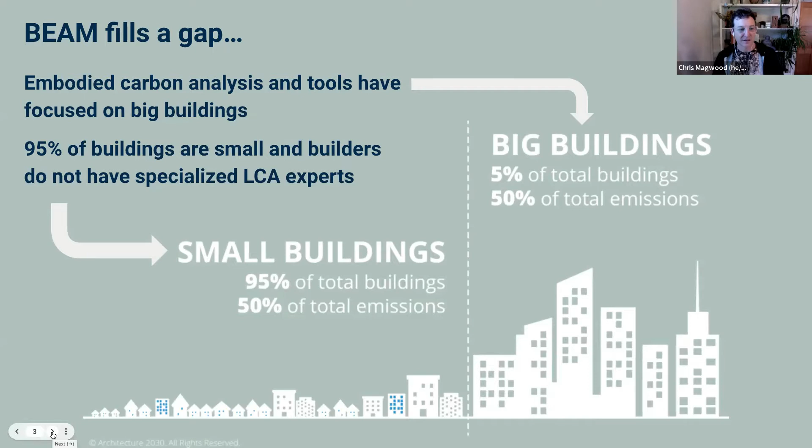It seemed like a big gap because whereas big buildings get a lot of attention since they're big and the firms that do them have sustainability experts on staff, small buildings are still a lot of what gets built in North America. Somewhere around 50% of all the square footage built in North America is small buildings, and not having a tool to study those seemed like a big gap—one that at first I needed to fill for myself, and then it became something I could share with other people.

These small buildings are quite different in the types of materials and assemblies they use, and in fact in their emission profiles because of those differences. There's less reliance on concrete, steel, and glass, but a lot more insulation and cladding relative to floor area, and a lot more competition in terms of variety of products and substitutions available—different kinds of flooring, cladding, windows, insulation, and things like that.

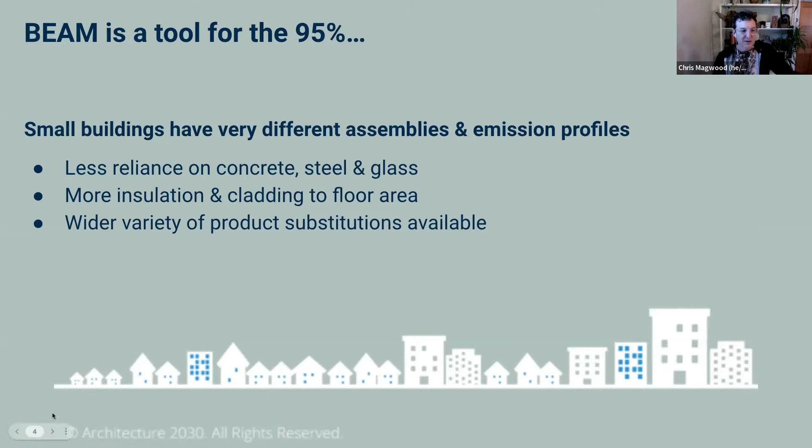So product choice ends up being a big part of what you want to be able to discern from a tool.

From building the tool out for my own study, I then applied it to other studies. After the thesis, I was asked by the government of Canada, the city of Toronto, Vancouver, and a smaller city called Nelson to do studies as they tried to figure out the extent of embodied carbon from low-rise homes. This is one set of results from the Toronto region study—a good study because we looked at over 500 as-built homes, working directly from the developers' plans, so we got accurate material counts and a good look at what materials they were selecting.

What we found consistent across all the studies is that in this space, buildings have a really wide range in terms of the actual carbon footprint of the materials—from upwards of 0.5 ton per square meter of floor area, down into the low hundreds. Some other studies had numbers even lower than that. But across all these studies, the average, in the range of about 190 to 200 kilograms of emissions per square meter, is pretty consistent, pointing to the fact that somewhere in that range there's a benchmark we might be seeing.

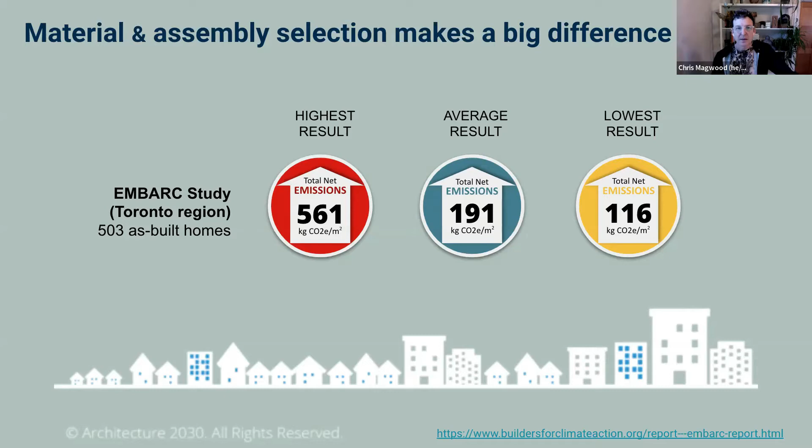The other thing the studies really showed, and I think this is what has spurred so much interest in the tool and the topic in the small building space, is that by substituting not that many materials necessarily, there's a whole lot of low-hanging fruit in this small buildings world.

This is an example from the Toronto study of a home we were able to model from its as-built plans, which had about 81 tons of emissions for the whole house—just over 260 kilograms of emissions per square meter. Through a handful of steps—choosing better concrete, substituting some insulation products, substituting some cladding products, and picking flooring and drywall products that were best in their category—we were able to show a 75% reduction through some pretty simple steps.

We'll dive into this a bit more later in the talk, but the whole reason the tool exists is to make gains like this really obvious and make it easy to figure out what steps would result in really big reductions.

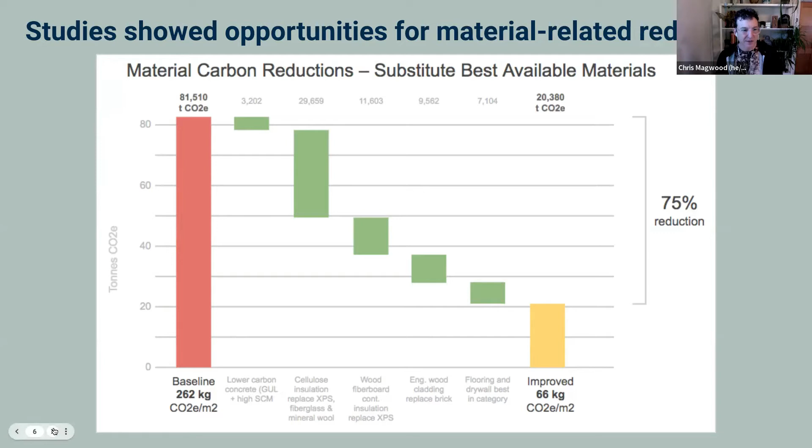So the tool is a spreadsheet-based tool. It operates in Google Sheets, so the sheet and all the data are in the cloud, and you work with it on your desktop. It does a few things: it enables you to do direct side-by-side comparisons of different materials, it allows you to model out different assemblies, and then also build out whole buildings as well. We'll go through what those steps look like.

Before I move on, I'll say that the idea for the tool, when I first started building it, was a tool for me. I am not a computer savvy person, and I'm not a very tool savvy person, so the whole idea was to build something for myself that I could figure out and use. I think it is a very approachable and easy to use tool, but aiming for pretty low bar in terms of me as a user.

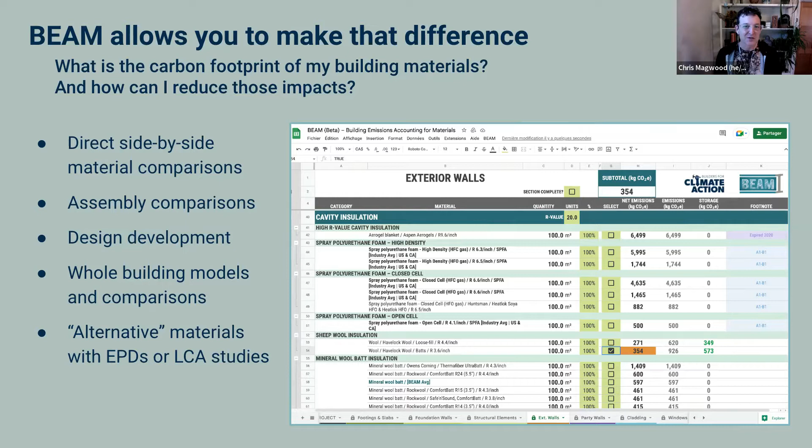In the tool, we decided early on that we were going to focus on the product stage of emissions from the life cycle. In life cycle assessment terminology, that's A1 to A3 - raw material supply, transportation to factory, and manufacturing. So those are the emissions that we're capturing in the tool. We are specifically not looking at transportation to site, construction or installation, any use, maintenance, or repair, or any end-of-life figures. So really focusing on that product stage.

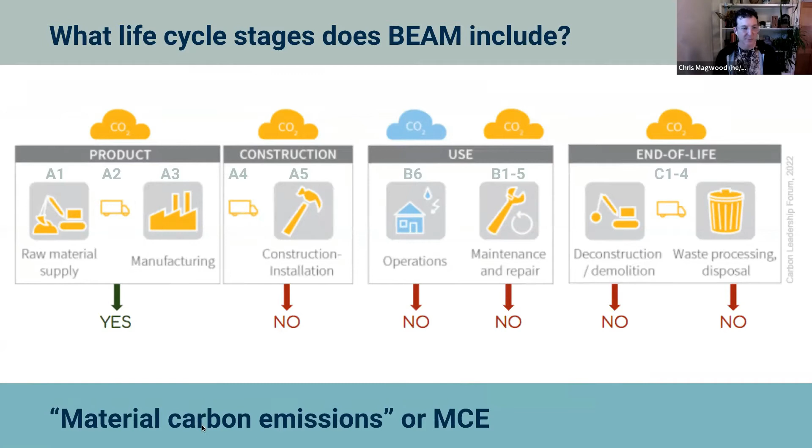The reason for that, there are a few reasons. The biggest one is that's where most of the emissions happen. Depending on the product, obviously different materials have different emission profiles, but typically between 65 and 85% of all the emissions that will happen from a material over its life cycle happen in this product phase. So it's a way to capture the bulk of what's going to happen.

It's also capturing emissions that are occurring now, and addressing today's emissions and being able to eliminate or reduce those is a lot more impactful than things that might happen at the end of the building's life. And also out of the data that we have, this is the piece that we know is as well measured and consistent and reliable and accurate as possible, because all the data is coming from the manufacturers and from the factories.

As we move along the life cycle, there's a lot more uncertainty - trying to figure out how far material traveled to a particular job site and by what type of vehicle it got there. There's a lot of uncertainty around that. What types of energy are being used and how on site is another uncertain thing. How often the materials will be maintained and repaired and replaced is also questionable, and so is how long they'll last and what happens to them at the end of their life.

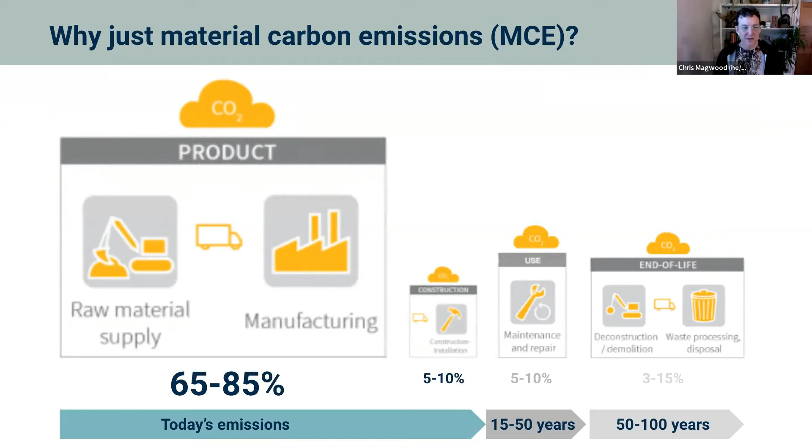So I definitely don't want anybody to leave thinking that we said all of that other stuff doesn't matter. I think it matters a lot, but in terms of a tool that's trying to show you actionable numbers, the product phase are the actionable numbers we can show you. These other phases are things you need to think about individually on a project - the distance you are from a material, how it gets put in site, what your waste and recycling scenarios are in your area. It's very hard to attach reliable numbers to those, but we feel like we can attach reliable and really important numbers to that upfront product phase.

So the way the tool works is that we're taking those product phase emissions factors, called the GWP factors, or global warming potential factors, from environmental product declarations. These are an ISO certified way of describing what needs to get counted and how it needs to get counted, and drawing boundaries around the equations for figuring out emissions from materials. Those are a third-party verified document, so they're standardized and quite reliable. We have in the background of BEAM all of these GWP factors from these EPDs. From that, we subtract biogenic carbon storage from the amount of emissions, and we can get into that in more depth later. But for now, I'll just say that's what we do, and we do that conservatively.

We figure out how much biogenic carbon is in the material, and we subtract 10% from that, trying to offer a relatively conservative figure.

The tool works by the user inputting dimensions, and the tool using those dimensions to do material takeoffs. So if you give us a wall area, the tool will convert that wall area into an amount of, say, framing or insulation or whatever material is part of that wall. Once all that math happens, you get a net emissions score for that particular material.

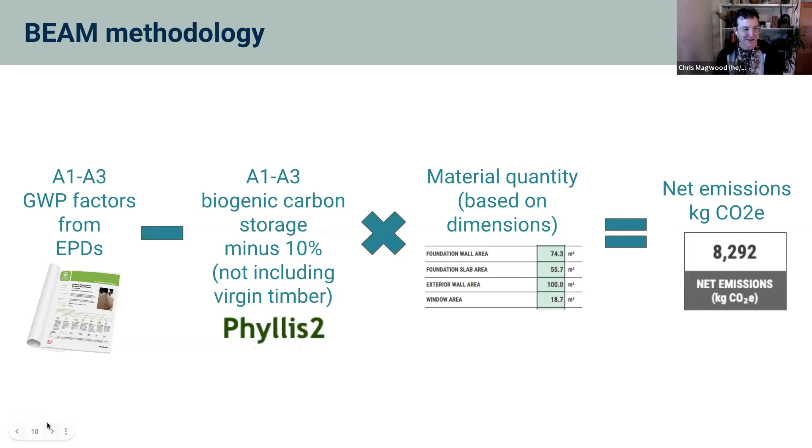Before we look at the tool, it's important to say what's actually in it and what's not. What's included right now are as many options as exist for the structure, enclosure, and partition materials in low-rise buildings. What's not included is mechanical, electrical, and plumbing materials, appliances, finishes, millwork, and yard work like driveways.

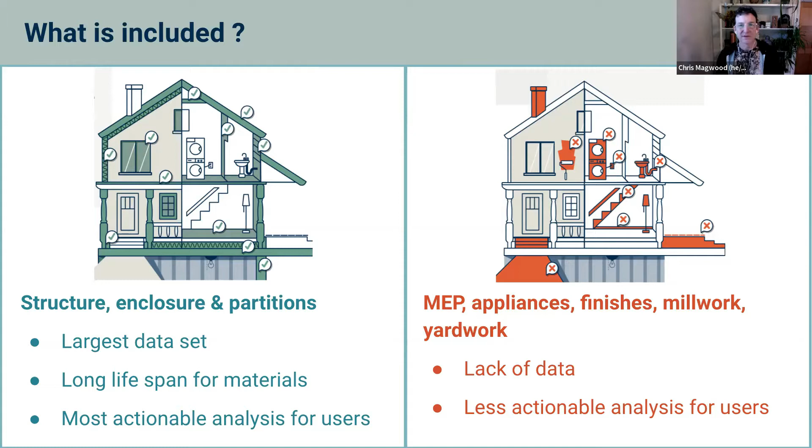Even if you know the carbon footprint of all the drain pipes in the house, you're still going to have drain pipes. You're not going to decide not to have drains, or not have water, or not use electricity. So those numbers might be useful to us when we can discern them, and it would be great to do that, but they're perhaps less actionable in terms of the choices we can make on the design and construction side.

The tool itself is a Google Sheet application. It's free, it's online. This is the URL to get there: buildersforclimateaction.org. You can go to the page—the tool is free, though we do ask that you contribute to help us maintain and update it.

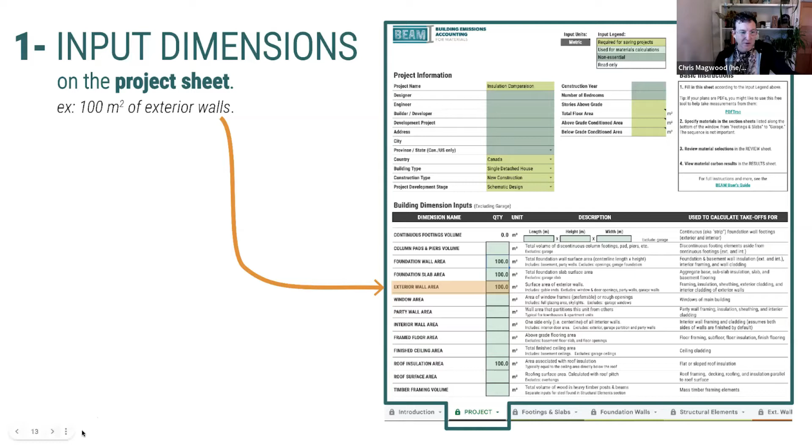One of the ways people use the tool is to do pretty basic comparisons of materials or assemblies. You can see, in the fields right now, I just have some nice round numbers, and that's quite often what I'll do, and what lots of users do, if you just want to see how one material or assembly compares to another. Or you can get very detailed here and build out a model for a whole building quite accurately.

The sheet is made up of a number of tabs. Each tab is one assembly of the building. So the one highlighted here is the exterior wall assembly, and you can see it's broken into categories. As you scroll the sheet, you'll find structural framing, sheathing, cavity insulation, continuous insulation—all the parts that go into that particular assembly.

There are sometimes additional inputs you need to make. So if you want to compare insulation, you have to input an R-value, because that's one of the multipliers the software needs to figure out the quantity of material. Once you have a dimension and an R-value, you can see the net emissions of a whole range of different materials you could use for that part of the assembly—in this case, cavity insulation.

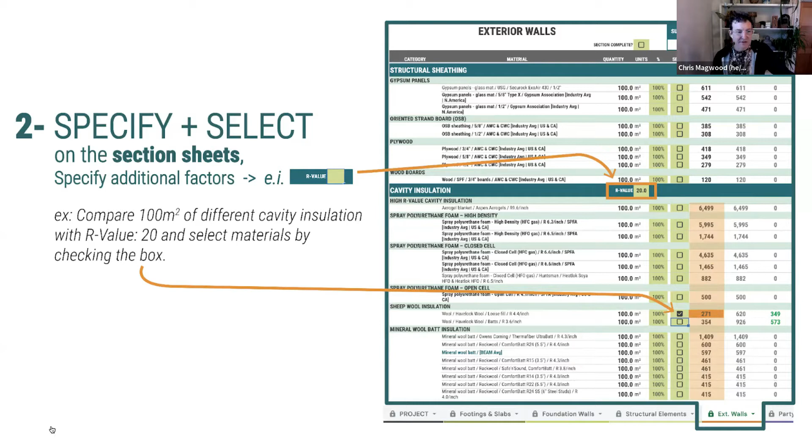So there are 12 of these assembly sheets. It's a bit like building the building from the ground up, starting with footings and slab, and moving along until you get to the roof.

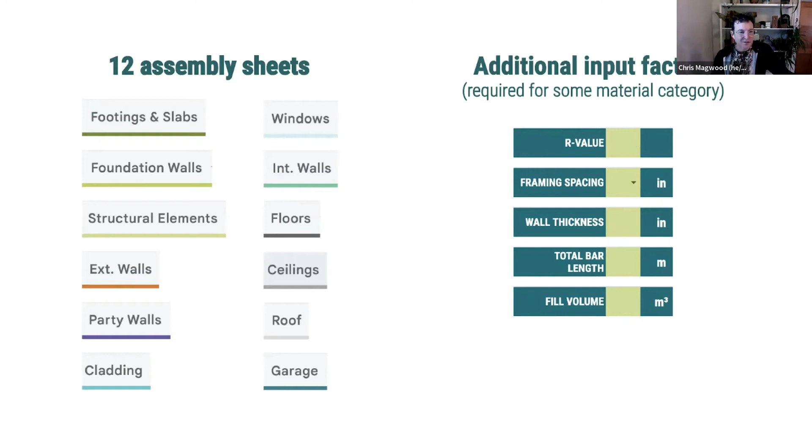There are some additional input factors in some categories: framing spacing, wall thickness for where you're specifying concrete walls, bar length for rebars, a few things like that, in addition to the dimensions that you put in, but they're pretty minimal.

When you've completed your inputs on all the different tabs, there's a review sheet that allows you to see all the materials you've selected. They're color coded by the assembly they're tied to, and you get to see all the emissions.

You get to see a total for the building up on the top right, and you also get cued as to which are your big emitters in the darker orange color, and your carbon storing materials, if there are any, are highlighted in green.

So the review page is really great to give a good overview of the building, but we also use it for quality assurance. You get to go through your model and make sure you've actually included all the materials you intended, and that you haven't input anything twice or wrong or missed anything.

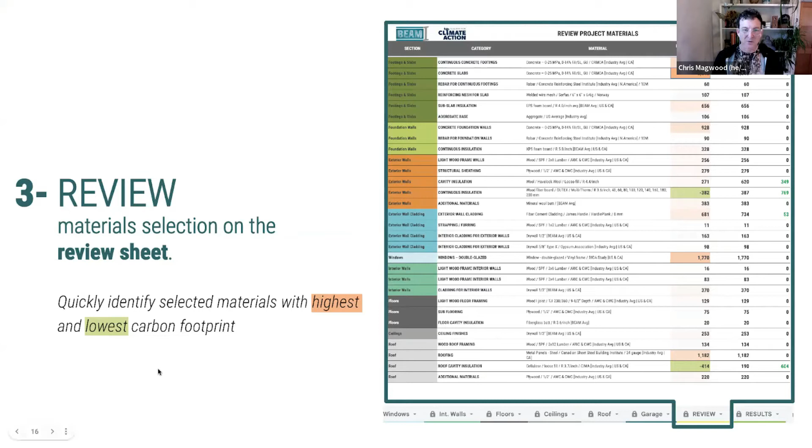Then there's a results sheet that comes at the end. It has a bunch of different outputs. It gets exported as a PDF, so it's easy to print and share with other people on the design team and clients and stuff like that. It gives you a bunch of feedback on the results for that particular model.

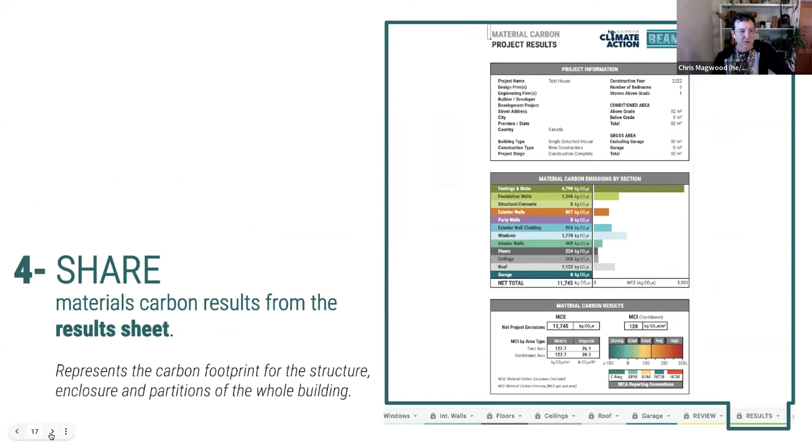There's also a save function, so you can create a baseline building, save it, and then make a new version of that building, change a handful of materials, and see what the results are.

You can do that as many times as you want. You can have as many different buildings, models, and versions of buildings as you want. There's sort of an unlimited save quantity in the sheet.

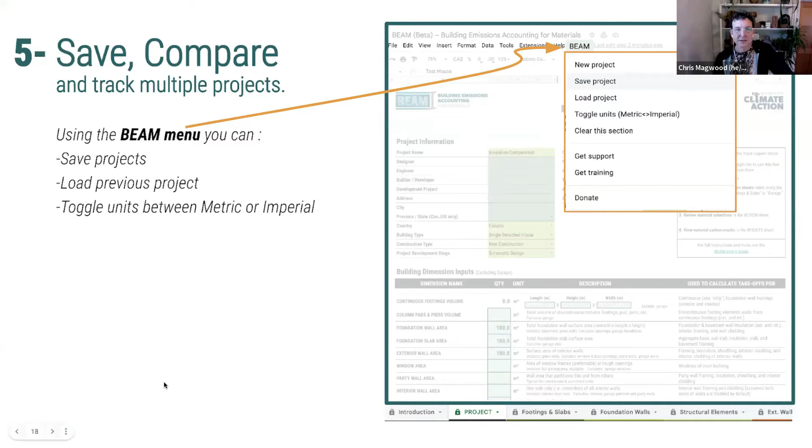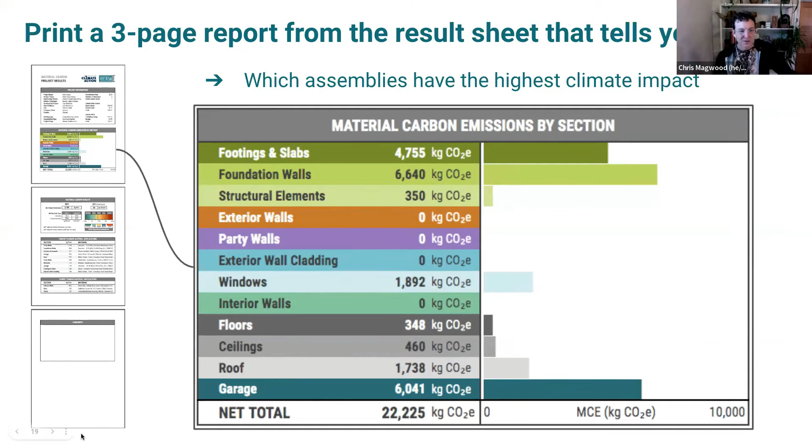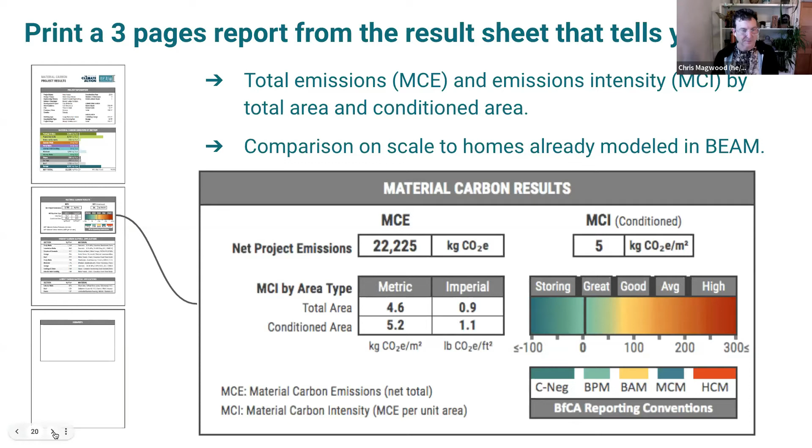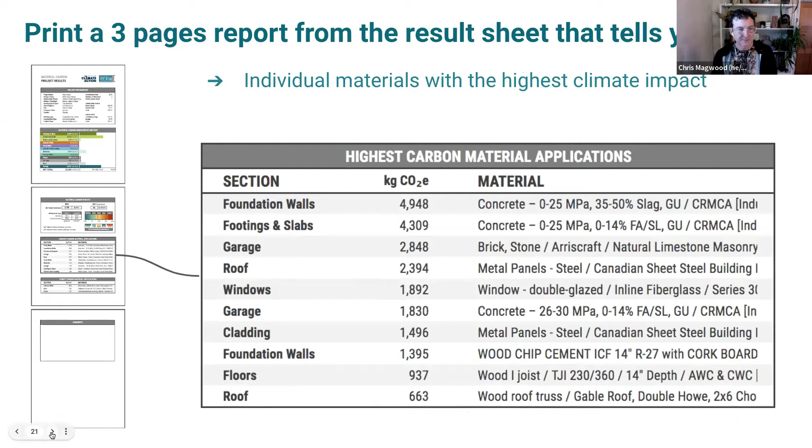So just a few examples of how the tool gets used. Obviously you can just compare materials together within each sheet of the tool.

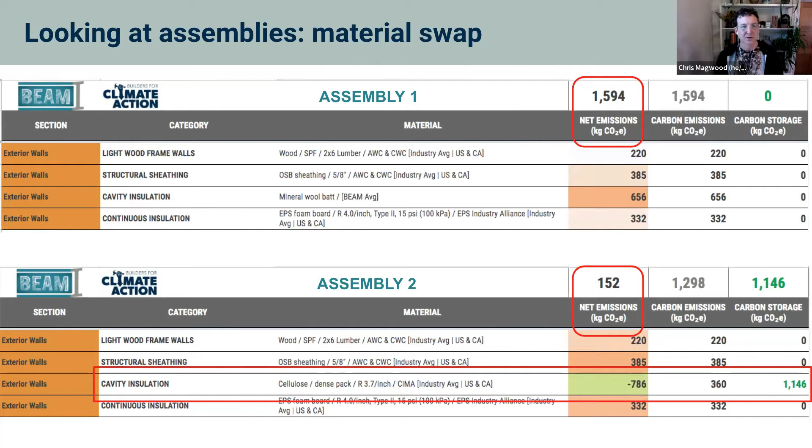That's the kind of thing you can learn as you look more closely at assemblies. You can also compare different types of assemblies. So here's a similar snapshot.

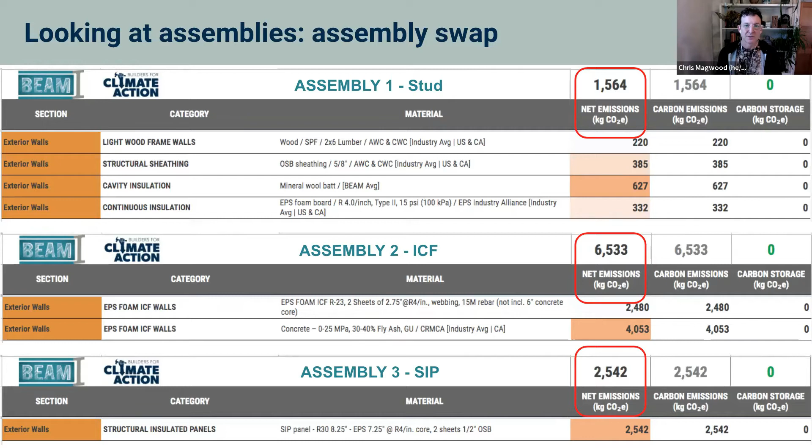I've set all of them so that they're all at the same R value, so that the thermal performance is comparable between them. But you can see there's quite a difference in the carbon footprint. The ICF is several times higher in embodied carbon than the stud wall, and the SIP wall is a little bit more than the stud wall, but not a whole lot. So if you're thinking about what kinds of assemblies you might want to use in a building, you can model them out in this way.

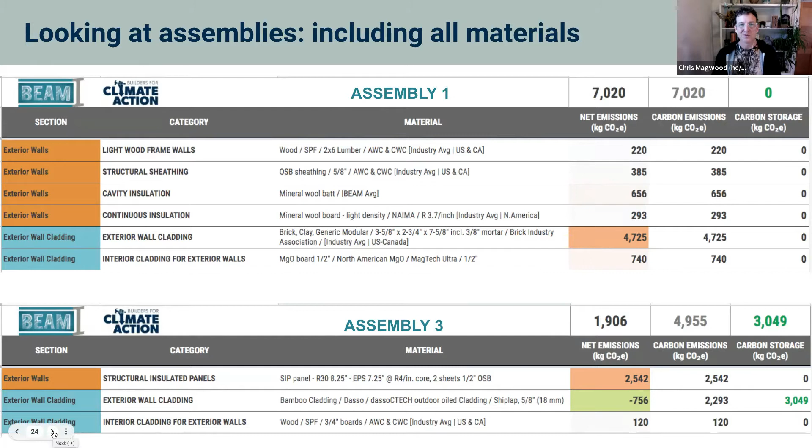One of the things we're hoping people take away from the tool is there's not one magic bullet strategy, there's not one magic bullet material. You really have to look at everything you're putting in the assembly, and there are trade-offs to be had. If you want to work with SIPs, you don't have to abandon them just because they have a slightly higher carbon footprint than other wall structure assemblies. You can address it by changing out the cladding and suddenly making it a better option. This is the way we envision people using the tool to get towards better results.

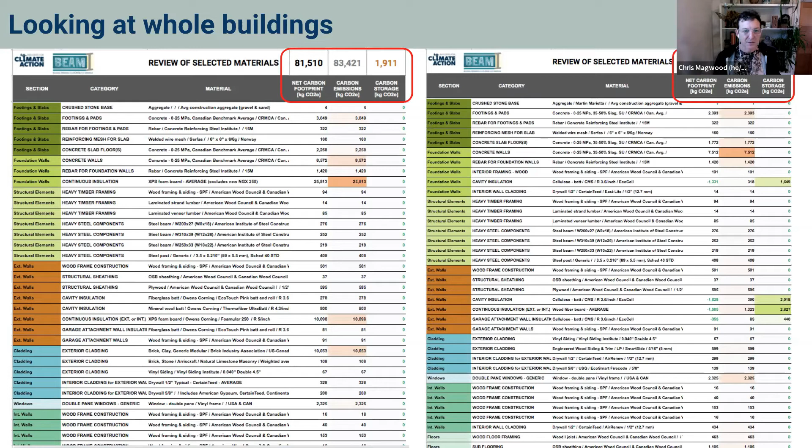And once you go beyond particular assemblies, the whole building strategy works the same way. On the left is a building modeled out in a baseline version, with 81,000 kilograms of emissions. We took the exact same building, same size, same performance, everything the same except the materials, and brought that down to 20,000 kilograms. So about a 75% reduction, using the tool to figure out where we could be changing brands of material, changing types of material, or modifying our assembly approach to get to a much better result.

A few last things before I wrap up this section on the tool. We try to be very clear that Beam is an estimator tool, not trying to give you down to a kilogram degree of accuracy. One of the things that may make it not 100% accurate is that we're making assumptions on the material takeoffs, using industry standards for framing areas and basically all the choices needed to calculate material takeoffs from the dimensions you input, so they might not reflect your practices exactly.

There's also no factor here for waste, so for those materials where you typically order 5 or 10% more than the building requires, that won't be reflected in the Beam results. We're also not doing anything currently to evaluate the quality of the EPD data we're working from. Sometimes some EPDs are better than others, having used really specific grid carbon factors for where their factory is, while somebody else's EPD might use a general statewide average. So there will be some variation between them, but we're only using third-party verified EPDs, and we're not making any judgment of one over another.

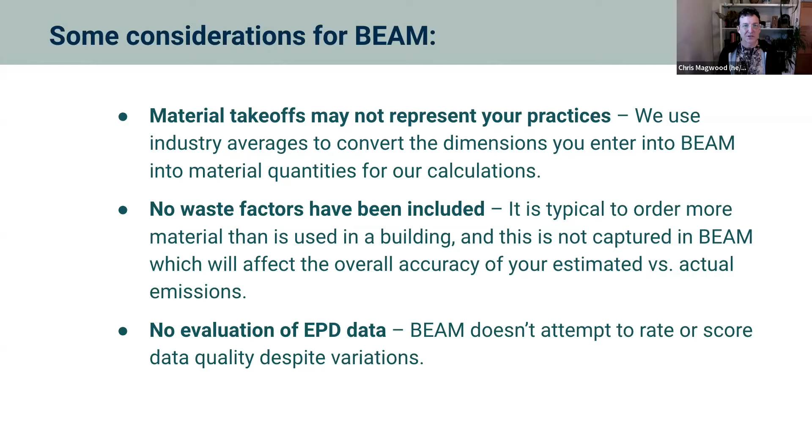I'm going to pause there and stop sharing. That was the intro part to the tool, and happy to pause here and take questions on the tool itself, and then Jacob will take over and put the tool in context and how it might apply to your practice a bit more.

Chris, there's some great questions in the chat that I was trying to keep up with. I think I got most of them, but if anyone didn't have their question fully answered... one just came in curious how biogenic carbon storage is calculated, which is always a juicy topic, so that might be a good one to hit on. Sure, I can start there. Do you mind, Jacob, picking the questions out and throwing them at me? That'd be great, it's hard to read and talk at the same time. Oh, I know, I was trying to block for you there. Totally, okay.

The biogenic carbon storage, the way we calculate it: one of the interesting things in the world of EPDs right now is that by the current ISO standard, a manufacturer can address biogenic carbon in one of three ways, and they all give very different answers. It's an anomaly, and it's strange. A manufacturer can choose to ignore the presence of biogenic carbon, or assume the +1/-1 approach, where there's a certain amount of biogenic carbon but it's all going to come out in the end, so you call it zero. That's kind of the same as ignoring it.

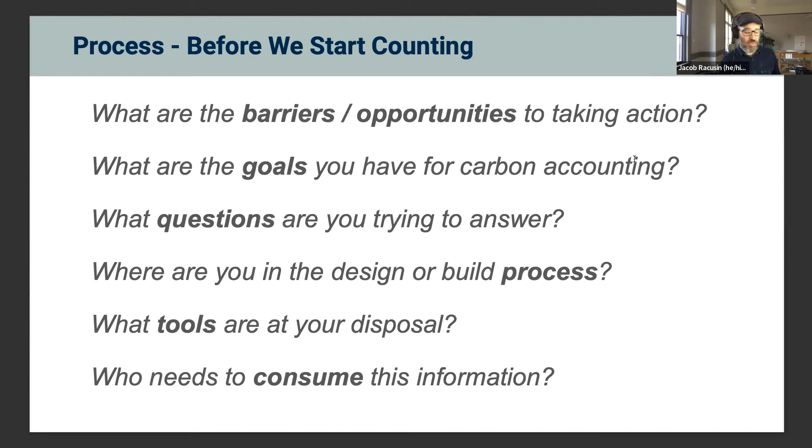It's just valuable to help tell a compelling story and to help enact change and take action. So how this data gets consumed is also part of the process here. I'm going to give some examples of this and then spin you through a case study, take some questions.

Many folks in the design process have what's called owner's project requirements. It's relatively standard, particularly in larger phase projects. We started using this even in our residential projects because it's really helpful and useful to formally capture all the owner's intentions, goals and desires. It also gives a good structure within which you can start having dialogue and establish formal goals around reducing climate impact.

And so it becomes accountable. Everyone's accountable. The owner's accountable to the things they're establishing as their goals. And then as the architect, if you've got a band of consultants you need to bring along with you, and ensure the structural engineer isn't going to fight you to the death about just throwing more steel at the situation—if there's an owner's requirement documented that the basis for design has to respond to, that holds a lot more weight than an architect just saying, 'I care about the atmosphere,' and the structural engineer saying, 'meh, show me why I should care too.' So there is some process here, especially if you already have established process around documenting your goal sets and having dialogue with the owners and getting their weight behind some of this.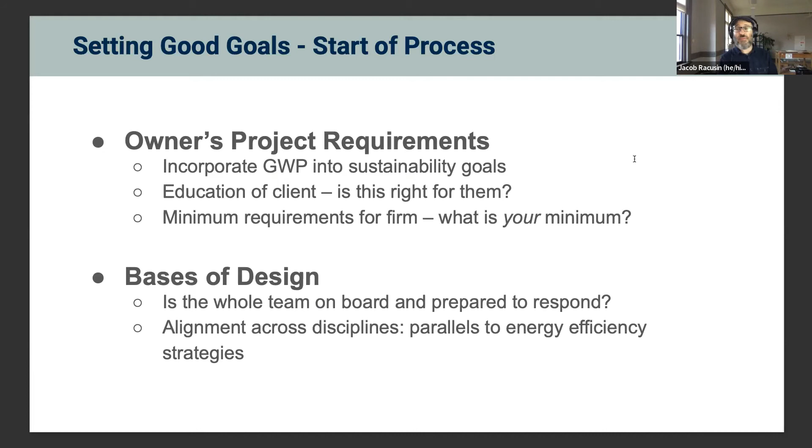Because as you saw with Chris going through the tool, every single material in the entire building can have a response. It's really a multidisciplinary exercise in how to reduce carbon across the entire building, not just within a single division. And the basis of design gives you a very formal opportunity to respond to those directives. So, just a couple of examples of goals.

I find this useful just to get a sense of what's good or not good. I see a lot of 'we're going to reduce climate impact and energy use in materials.' That's great because it's specific and relevant to the cause, but there's no way to measure it—it's not quantifiable. Reducing impact is a pretty slippery fish; it's an easy goal you could drive a truck through the accountability of. Something with a little more teeth tends to make for a stronger goal.

There are a lot of programs and standards that reference a reduction against the baseline. We'll talk about how to orient around that. An example would be reducing your EUI, your energy usage intensity, 30% below baseline, or reducing the concrete global warming potential by 20% below baseline. That's great because now you can measure something, quantify it, defend it, and hit a target.

Defining baseline can be its own whole process, and even that can be kind of gamed—that can be slippery too. It could just be more work if you need to define a baseline. The reporting and research that Chris mentioned, that Builders for Climate Action has done, goes a hugely long way toward getting some benchmark data established for residential construction. So I'd point there for the residential space as a good place to start for defining a baseline.

Also, EUI is not the same thing as climate impact. Energy is not carbon—there are carbon emissions associated with energy, but it's not the same thing. So if you're talking about energy, set an energy goal. If you're talking about carbon emissions, you need to set a carbon emission goal. You may need both; both may be relevant. And concrete is a great place to look because we use a ton of it and it releases emissions. But if you're doing lighter frame construction, or there's not much concrete to begin with, that may not be the biggest problem to solve.

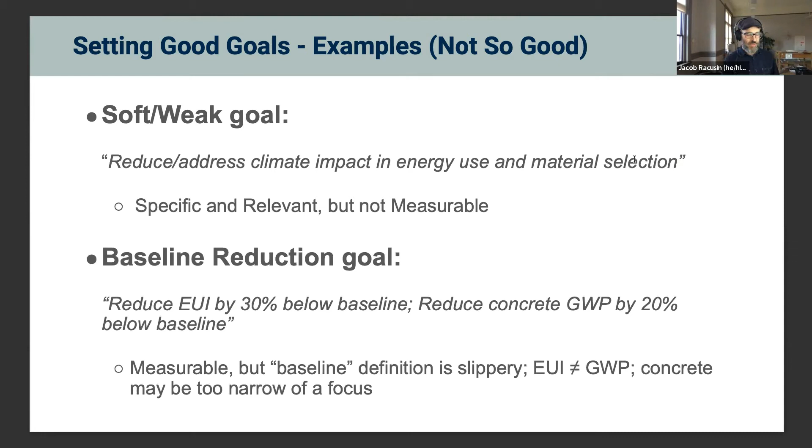Overly defining what you're trying to hone in on can be really good or really bad. That's the sort of thing that comes with experience, starting to understand the numbers more and getting a better sense of where you need to hone in before doing the rigor of a whole project. A really strong goal would be a max EUI of 25 kilowatt hours per square foot with no combustion, 100% renewable offset, and a max cap of embodied carbon.

That's great because everything's defined, it's performance-based, you can get there in a number of different ways. It's not overly prescriptive, it's specific, it's relevant, it's measurable, it's all the things you want to see. Is it attainable? Can you actually hit that goal? Is that a reasonable goal for you to try to attain?

Again, that's the sort of thing that comes with experience and doing more of this analysis to get a sense of smell. Those of us who have been in the high performance or energy efficiency space for a while have a sense of what EUI 25 is. That may be familiar because we've been doing this for a generation. Embodied carbon numbers, less so.

And again, I'll point back to the Builders for Climate Action research. Chris was identifying the mid 100s as sort of a median average we're seeing for a whole bunch of those residencies. So in this case, 500 might actually be very easily attainable if that's a similar building type too. And then certification can be a goal as well.

If you're going to pursue the ILFI zero carbon certification, there's your goal. The biggest thing to understand is it doesn't take any responsibility off of you as the architect to identify whether that's a good goal and what's required there.

I like to think of certifications as basically a proxy for your project goals. You're outsourcing your goals to an organization that may be better positioned to evaluate what good goal setting is. We do that with LEED, we do that with any certification. We're like, well, we're going to say what they said is good, and that's going to be what we said is good for this project. And it's our responsibility to make sure that certification is actually appropriate and relevant to the project.

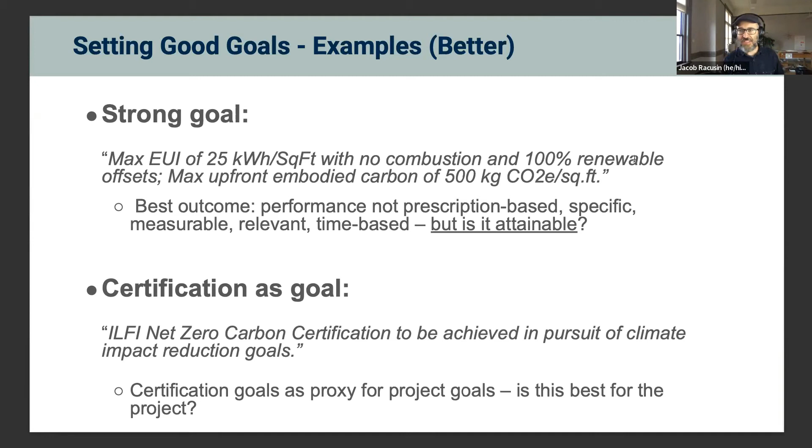Just because it says net zero carbon doesn't necessarily mean it's a good standard or that it's the right standard for your next job. All right, let's look at a couple different ways of thinking about modeling.

This versus that would be maybe the most obvious one, or the easiest point of entry, especially if it's overwhelming or too much to commit to looking at an entire building. You're just trying to get some initial look at different combinations of material options.

So in this case we're looking at two different ways. One would be an easy material entry point, like wood fiber board or mineral board. We've been using mineral board a lot. We're interested in using wood fiber board. What would the difference be there?

As Chris mentioned in that layout of the tool, it makes it super easy, just literally at a glance, looking within any of those project tabs, to see what the emissions differences are. So that'd be like a direct comparison between two emissions.

I really love using Beam early on in schematic design because I have an opportunity to look, in this example, at different massing schemes. Again, for those with an energy modeling background, it's a similar analogy where you might do a basic box model for energy modeling early on to get a sense of the impact of adding 7 additional corners to this building.

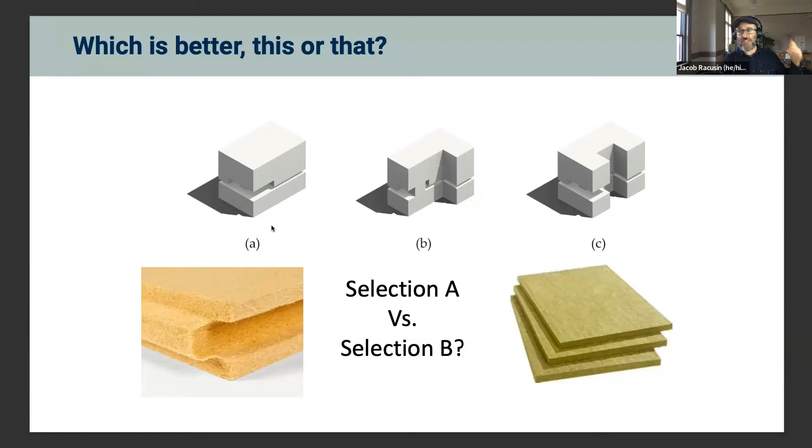You can get the same information. If you have that information early in SD, you can make those decisions and changes inexpensively and cheaply. If you don't figure this out until design development, it may be a little too late.

Another similar version is, how much better or worse is this than whatever my baseline is? That baseline could be industry average, it could be the last thing I did, it could be what the CM is proposing, whatever you want to assume as a baseline. But that's: I set a standard, and now I'm looking at am I better or worse.

Again, these are all sort of comparative analysis. You're probably ruling out a bunch of variables. You're limiting your focus, and you're comparing directly between two different scenarios.

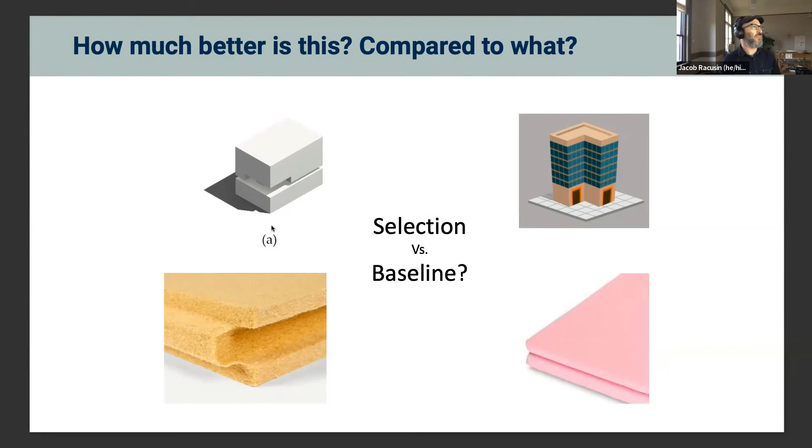That's different from another amazing power I think Beam has, which is to do what we call absolute, or a full quantified analysis. That's how much does this emit? You're not comparing it to anything, you're just looking for a total. What is my total impact here? That begs a lot more work on your shoulders as an analyst.

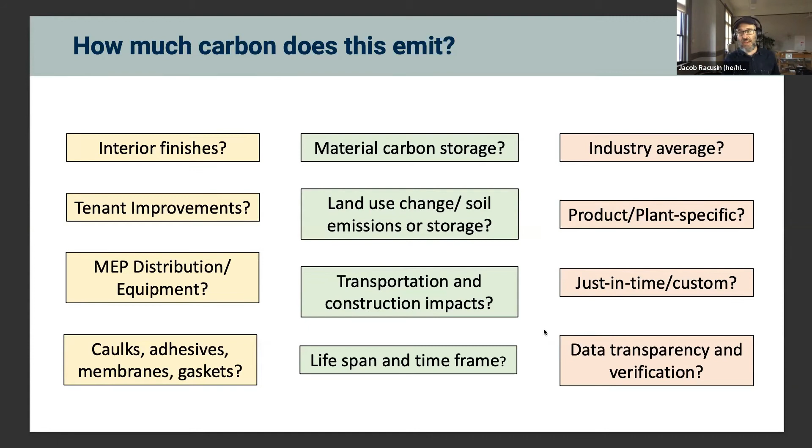And then the quality of the data on the right there, that's one thing I think Beam shines at, in that it's using actual real product data. So you can get quite specific on a product by product basis, and in the case of concrete, you may even be able to get a custom developed EPD for your specific concrete mix and use that level of data accuracy. Those are all questions that will govern more of that type of analysis.

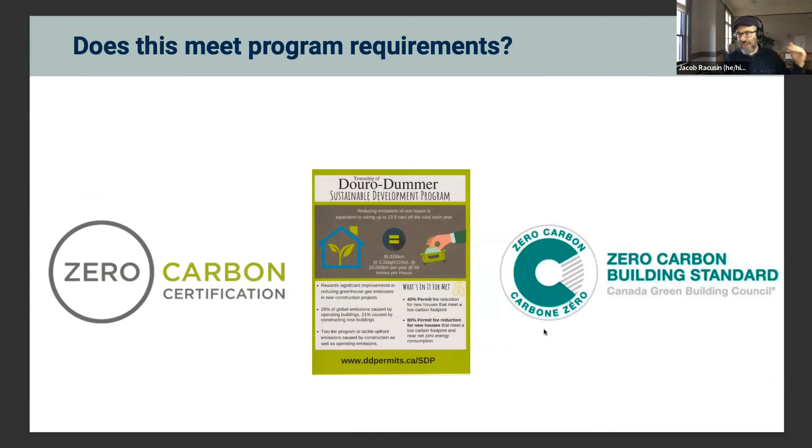Does it meet program requirements? That's pretty straightforward—you look at what the requirements of the program are and make sure your tool complies. Beam works as a verification tool for many programs, and that's a different set of analysis. Do I meet the program requirements? That's usually going to be a material carbon intensity value that you have to meet, for example.

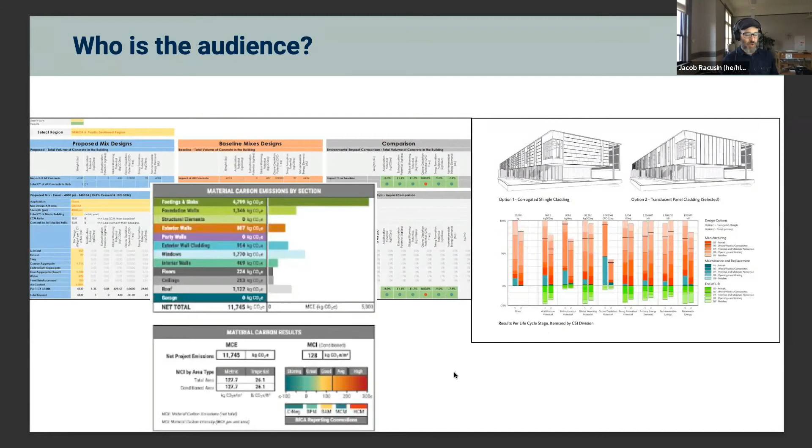If you're talking with your clients, a spreadsheet may not compel them, but looking at really big and really small bars will communicate that information really quickly and easily. So just consider that as you're going through the analysis—who's ultimately going to consume this, and how do I use that information well. In the interest of time, I'm going to keep moving along so we have some time for questions at the end.

I'm going to walk through a relatively recent project. It's under construction right now; the modeling is all done. As a case study, just to show how I've been working with the tool and putting some of what I was just describing into action here.

So in pre-schematics, when we were still in ideation before we fully launched, we started early talking about this. The selection criteria on behalf of the college was to meet their climate action plan, which included having this be the first building built under their new climate action plan. So they really wanted to make sure it was going to be built with climate impact metrics in mind and evaluating part of the design process.

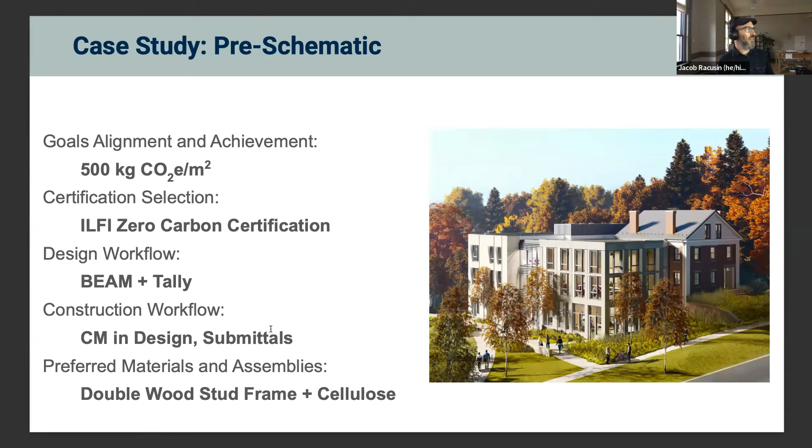In schematic design, what we did by the end of SD was validate our pre-schematic targets. Like, yep, this still seems appropriate. Actually, we were blowing past them, so we recognized we may need to amend those.

At the end of SD, the client identified that we should keep that certification as a basis, but they decided they weren't committed to following all the way through with it. So we were still referencing the certification, but it wasn't a formal requirement. That was really important for us to name coming out of SD as to whether or not we're going to have to hold that accountability or not.

And we named a bunch of our strategies. When I say named, I developed a report that had all of these pieces identified and circulated within the entire project team and presented to the owner—again, that transparency and accountability around our process.

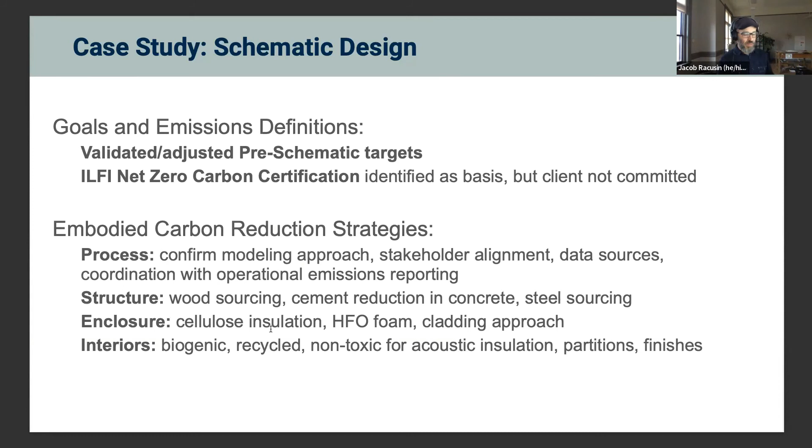So we talked about what the modeling approach is going to be, making sure all the different consultants were aligned around that, naming what our data sources were going to be, and looked within structure, enclosure, and interiors at what areas we're going to focus on leaving SD. This was established collaboratively within the design team to make sure we can all get behind these approaches and they work with each other—a lot of coordination and a collaborative approach for that multidisciplinary package of solutions.

We also looked, at the end of schematic design, at the CO2e intensity both with and without storage. I did a little post-processing to look at, okay, if we were to give some storage credit to FSC certified wood—because that certification program allows for that—what might that look like? So in a lot of my reporting I'll look at both with and without that storage, which gives some bracketing of how much we're dependent upon good, quote unquote, wood to offset, and also the unlikelihood of getting really good verification in the supply chain.

So really being able to look at these buildings as, you know, not pretending that they're steel, but not necessarily giving that storage credit for all the same reasons Chris mentioned so well before. What you're seeing here, I broke this into three different little buildings so we could get a sense of each, because they're different construction types and different material components—so you can get a sense of what they're looking like individually and then together.

And what we found, even without giving any storage credit for the wood, we were well below our target. Okay, phew, good, we can proceed—there's not a crisis yet, we don't need to be super guarded about whether or not we're going to meet our standard. If anything, we need to set a lower standard, so we spent a fair amount of time looking at what a lower goal might be.

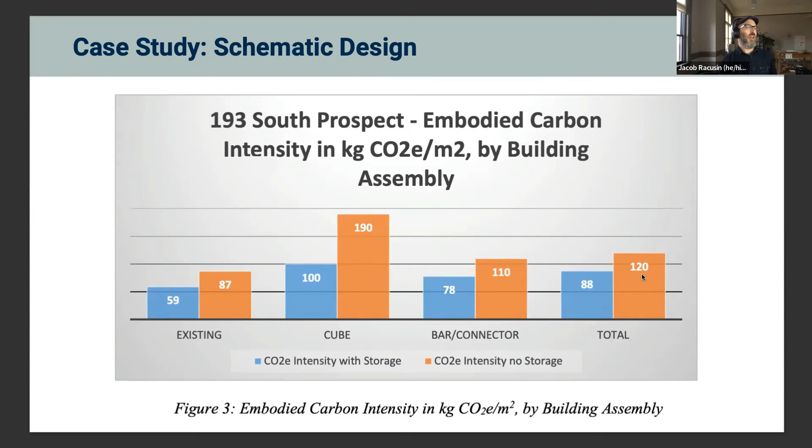Here's another example of the output coming from Beam. You can see a lot of rounded numbers—again, this is SD, we didn't have a ton of information at that point.

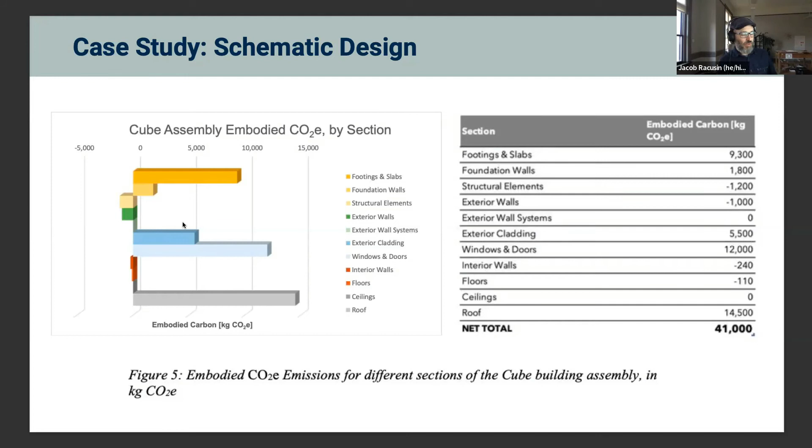It's not like we had all of the layers assigned, but we did have a pretty good working understanding of what the assemblies were going to look like and could zero in really quickly. Footings and slabs, windows, roofs, there's a fair amount of emission material in there for a few different reasons.

So that gave us a pretty good visual and quick cue as to where to focus, seeing how some of the negative emissions from our recycled insulation materials are really working in our advantage. At the end of DD, by the end of DD we had a full BIM model built out in Revit, and we were able to create a Tally report. Tally is a plugin that goes with Revit, a life cycle assessment tool.

It's using industry average data from a life cycle inventory database, not product specific data and EPD data like Beam uses. It's also looking at a series of different environmental impact categories, which we were basically ignoring for our analysis, and has a way more granular accounting, because it's looking at every single material you're defining in your Revit model. So there was just a different density of information.

I compared between SD and DD to get a sense of how we were tracking and how things were changing. Always a good exercise, even if we were staying within Beam, that would have been a really important exercise to see, okay, how are we doing? Do we make changes?

It's not unlike cost estimating. You cost estimate at the end of SD, you do one at DD, like, oh, it went up 20%, shocker. So planning for some of that and understanding what increased and then trying to figure out why it increased. There's both a quality control value.

I've caught numerous errors in multiple different Tally analyses by comparing it to a Beam output and being like, these are really different. Like, oh, we counted that stairwell four times, or we missed an entire wall in our Revit modeling. That's actually surprisingly easy to do when trying to get a good BIM output. So there's some good QC that comes from using a really quick, fast tool like Beam, even if you are also going to use a BIM integrated LCA tool.

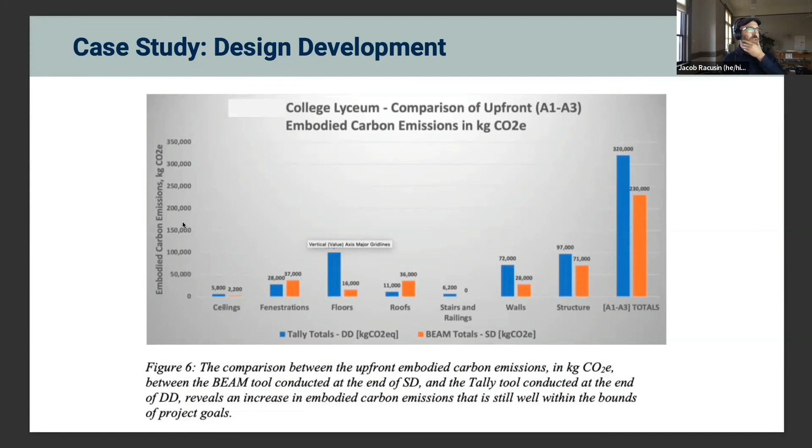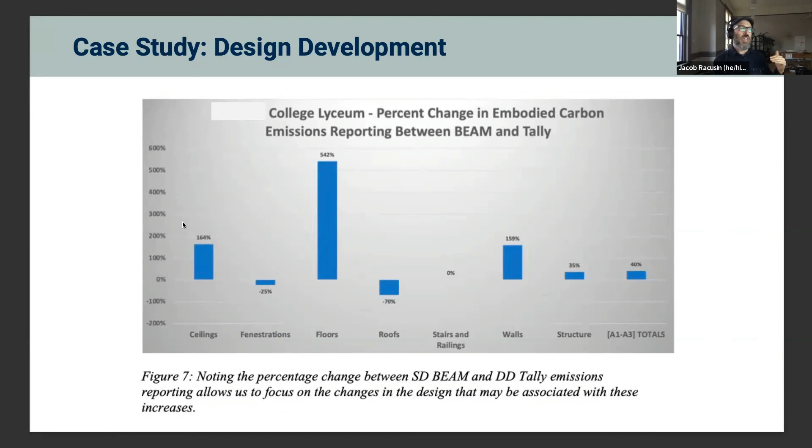So anyways, this just gives us more information, making sure we're on track. Another thing is to look at the percentage of that change, which is another good way to really hone in and be like, oh, floors dramatically increased. Does that make sense? Was there an error there? Did we make a design change? And can we still hold for that design change and still hit our climate, our material emission goals?

Moving along to construction documentation, again looking at these categories. They're slightly different than the categories from Beam, but they did correlate fairly well, not super far off.

Again, we're just looking at by the very end of CDs, we're not making any real major substantial changes at that point. It's really more of a reporting effort, but it also shows us, did we meet our goals? Are we on target? What does that look like with or without the biogenic storage for wood?

That's not information you're necessarily going to get out of Beam, but in the case of this certification, where they were allowing us storage credit for FSC certified wood, it became relevant to weave that into the analysis. It gives us a sense of, wow, there's clearly a whole lot of wood in our floors, and this had some CLT, some mass timber elements accounting for that.

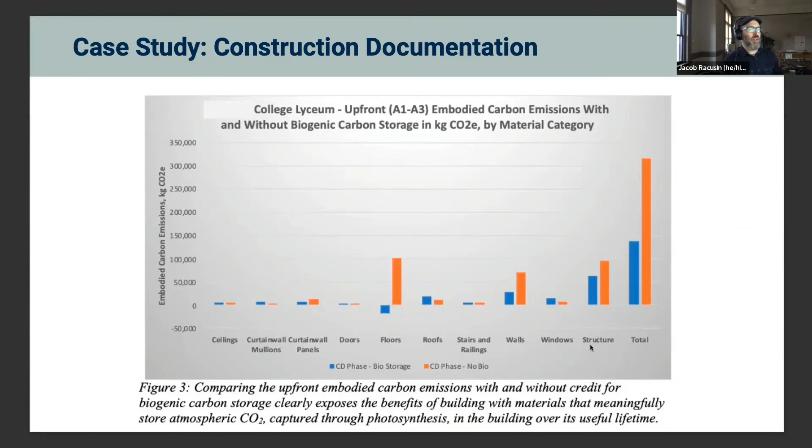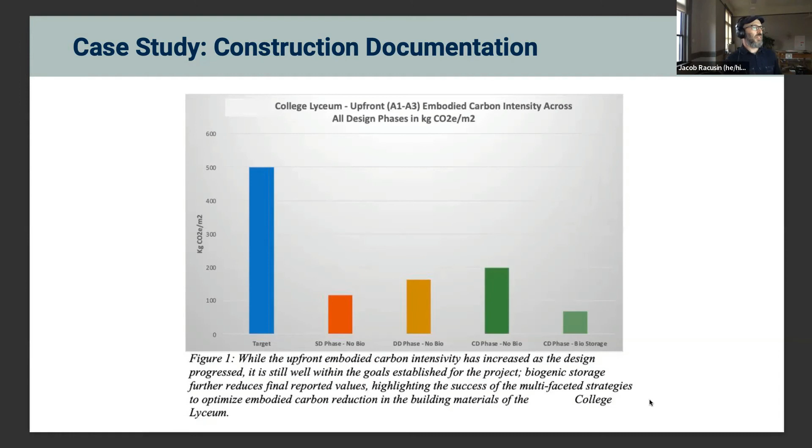So it gives us a sense of how we're doing, how did it turn out by the end of CD, before we head into the final process in CA, accepting submittals and getting down to a product by product basis. Tracking what our target was and how the project moved across those different phases is also really useful information for predicting your next project. Like, we should really put an extra 20% slop on SD, because the more detail you get, the more information you get, the more emissions you're going to continue to account for. So different ways of looking across the phases to see the trajectory of your goal setting.

Just to get more tangible in the final minutes here about some of those strategies and how this is now switching. What I was just showing you was reporting that I had mostly for our internal team. What I'm showing you now, give credit to Bruner/Cott, the architect on this project, and Christopher Nielsen, the lead, who prepared this really great sustainability report for the client.

This is the communication back to the clients to let them know what our solutions were and help them tell a good story to their stakeholders. As a university, it was really important that they could tell the story of this building and validate why it was in alignment with their climate action plan. So we helped them with this much prettier version than the slides and graphs I put together for our internal team. Just looking at a few excerpts from that.

These were the various material solutions we used. We really worked to keep the old masonry building intact, since all of the emissions from that structure were already released a long time ago. So we're trying to extend the life of materials that already exist and whose emissions were already released, as well as speccing very specific types of materials, structures, and installations to get to the end zone on our accounting.

This is the industry average cap for the benchmarking that the Carbon Leadership Forum had done for this type of building. 500 is the standard we were shooting for, 400 was the good building median, again using Carbon Leadership Forum's prior benchmarking. They just released some new benchmarking, which is super helpful. Again, if you're trying to compare to a benchmark, where do those numbers come from? CLF has done a great job of helping support that.

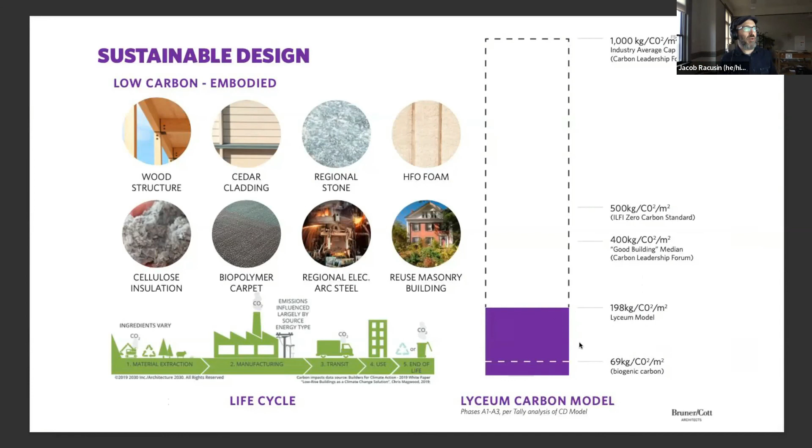Our model with and without the biogenic carbon is shown here in purple and then that dashed line. That was really helpful to see how good a job we've done. On the left here, I won't take time to read through all of it, but we talked about the specs and elements that made it formally into our specifications that helped us achieve those low outcomes.

Zeroing in on finishes, it was really cool to see—being a little dramatic, but there were like square miles of gypsum and carpeting in this building, just a huge volume of materials. Normally we think of insulation and structure, especially structure in larger buildings, as the big problem to solve. In this case, it was double stud light wood frame construction. We did a really good job with some CLT elements and mass timber elements, really keeping the structural loads down.

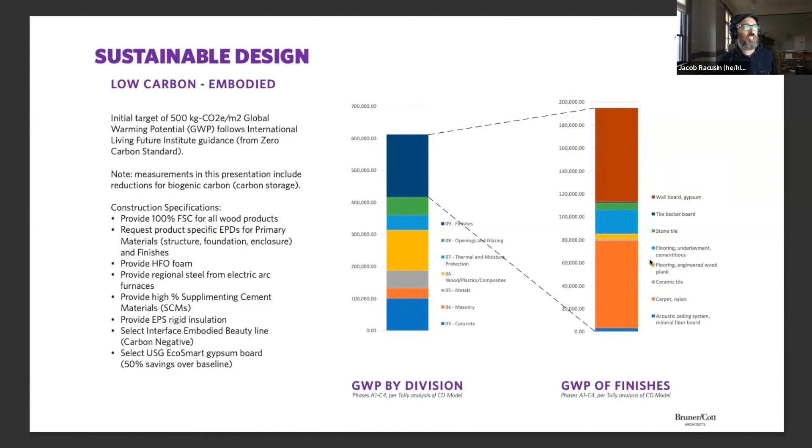There were some really big emissions in conventional finishes. When we were using the LCA data, which is just industry average and doesn't get into specific products, we saw a pretty big plume of emissions for gypsum and carpeting—carpeting partially because it's a high emission material, but also just because we used so much of it in this project. Then when we used Beam on an EPD basis to dial into the details, we chose a super low emission carpet and the best in class gypsum wallboard, and built those into the specifications.

This is where we identified that we have a CM on board, and we can validate that we can get those materials, ensure we'll get a submittal, and approve those particular materials—really validating that all the way down to the product level during procurement.

That knocked 53% of the emissions out of our finishes division, which was 17% of the total emissions of the building, just from carpeting and drywall. Those are the types of successes I get thrilled about, because if we can dial in a carpeting and drywall spec and knock 17% of the emissions off the building, that's some really low hanging fruit—we're literally kicking apples around on the ground to get that type of reduction. That's an example of where we wouldn't have gotten that information out of an LCA tool; getting to product level data and being able to defend a specification was key to getting those low numbers, and quite simple to do with the right data set.

Chris, feel free to jump back in on this one, but really just trying to show that there's a real host and diversity of different ways of achieving ultra low, near and below net zero carbon buildings. A mix of different buildings that are really at that ultra low, hyper mile, low carbon enclosure, finish and structure deliveries. Some of these are residential, some commercial, with a variety of different architectural styles. There's just a wealth of opportunities for how we can achieve these goals that don't need to be restrained by a certain cottage aesthetic, or only relegated to small residential construction to get there.

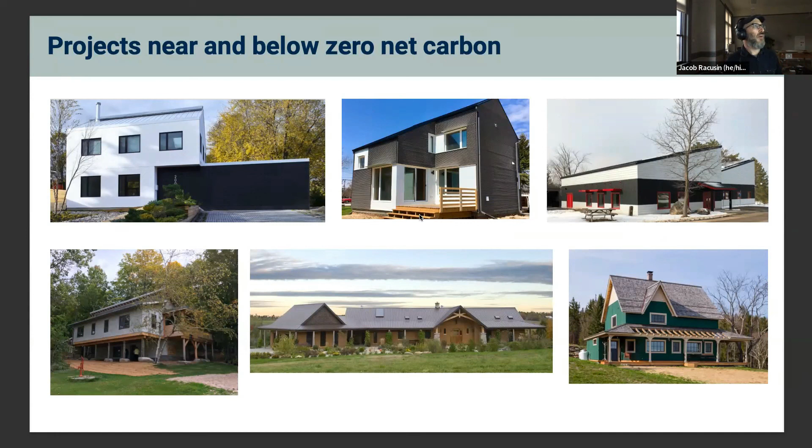It's the only other vignette I'll share briefly since I have an extra minute. It didn't actually show up here, but we found that in interior acoustic insulation, by changing the spec from fiberglass to a cellulose batt product, we went from emitting 2.5 tons of carbon to storing 4 tons of carbon in the interior walls of the building. The owner was so thrilled with that—the concept that we were banking and storing carbon throughout all the interior partition walls. Something as banal as acoustic insulation became this major amplifier of active carbon storage in the building, for something that's not very expensive. That was just another great win.